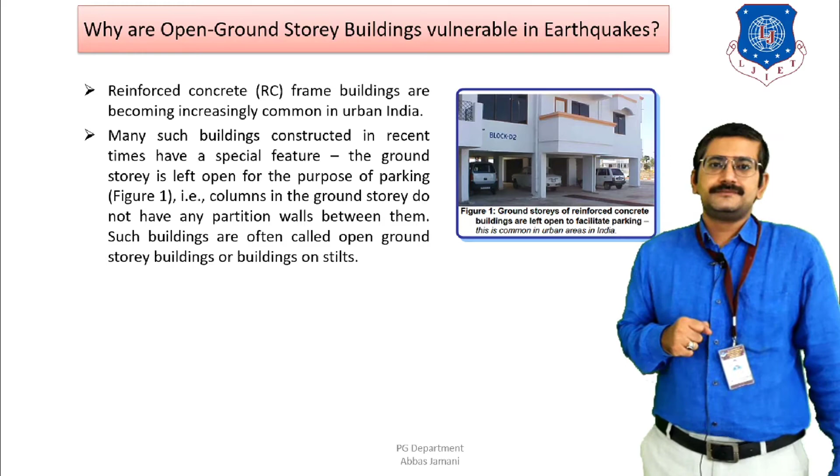And I hope that today's lecture is going to give you sufficient insight about the importance of masonry walls at the ground level itself, so that the strength and the ductility of the building can be ensured. So when I talk about open story buildings, history itself says that the performance of these buildings has always remained poor in earthquakes. In the 1999 Turkey earthquake, the 1999 Taiwan earthquake, or the 2003 Algeria earthquake, it has been observed that buildings with open ground story have been vulnerable, and a lot of buildings of similar geometry or planning collapsed during the severe shaking of the ground.

So this is a scenario that is observed worldwide. But when you come to India, at the local level, a large number of buildings can be seen coming up in the country as well as in the city. In Ahmedabad, it is said that approximately 25,000 five-story buildings are present, and around 1,500 11-story buildings. Now this is old data. At present, buildings are 7-story, 12-story, 14-story, and now we even have 22-story buildings. And next we are going to have 30-story and 70-story buildings coming up, right?

So a large number of these buildings are coming up on a daily basis, and all of them are going to have the same feature, that is the open story at the ground level. Why? Because parking facility is to be provided, and then partition walls are absent in this type of building. I have given the example of Ahmedabad, but similar buildings are coming up in other cities also, located in zone 3, zone 4 and zone 5. All these three zones are seismic prone, and any multi-story building with an open story at the ground level is going to be severely affected if not properly detailed or properly designed.

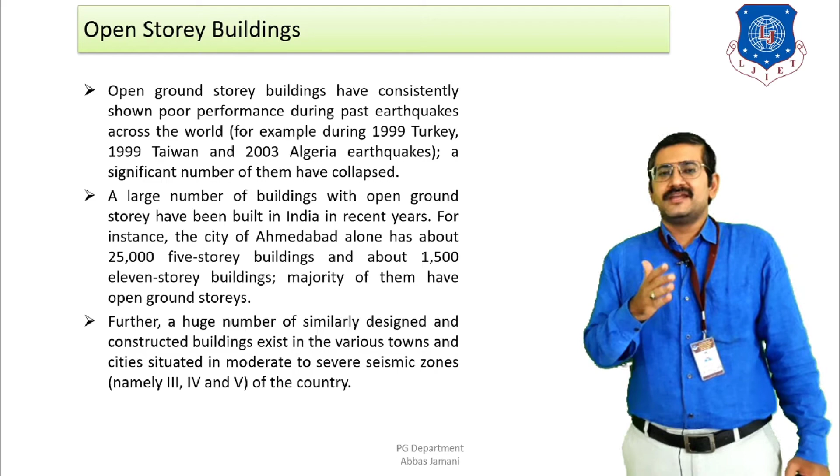So now what is the actual problem? That is what we are going to understand next. From function point of view it is okay, from elevation point of view it is also okay, but from structure point of view, what is the actual problem, as a result of which we are taking up this topic under the effect of earthquake loads today?

That is, the buildings which have columns at the ground floor and both columns and masonry walls at the stories above are going to have two peculiar features. The first feature is that the ground story is going to be flexible in nature. Why is it going to be flexible? Because the horizontal displacement that the ground story undergoes is going to be larger as compared to the stories above.

Why? Because the stiffness at the ground level is going to be less as compared to the stiffness of the stories above. In the stories from the first floor up to the terrace level, the infill walls and the columns have a combined effect, and as a result the stiffness above increases. Whereas in the ground story only the columns are present, so the stiffness is less than that above. As a result, the horizontal displacement is larger at the ground level than at the stories above.

If this situation is there, IS 1893 coins this particular behavior in the structure as a soft story. That is what we discussed earlier also, that soft story is one of the reasons why open story buildings cannot perform sufficiently under earthquake loads.

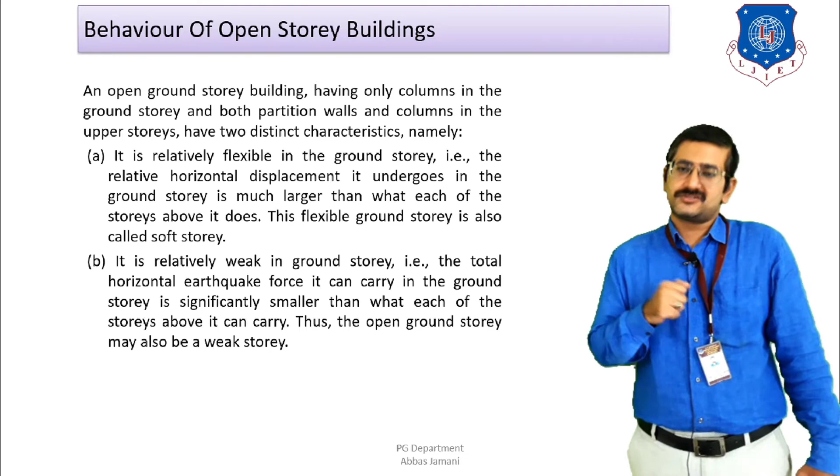That is, this story is comparatively weaker than the stories above: the ground floor is the weaker story, and the above stories are stronger. Now, when the geometry is such that there are only columns at the ground floor, and from the first floor onward both columns and walls are present,

the above stories are going to act as a single unit or a single block, and they move together under the application of lateral loads. Whereas at the ground floor only the columns are present, and as a result the movement is like that of an inverted pendulum, which we will see in the figure I am going to show in the next slide.

So when these horizontal forces act on the building, the building undergoes horizontal displacement. And we have discussed that in case of lateral forces, reversal of stresses is considered. That is, the earthquake force is likely to act in the plus direction and the minus direction as well, so there is back and forth movement.

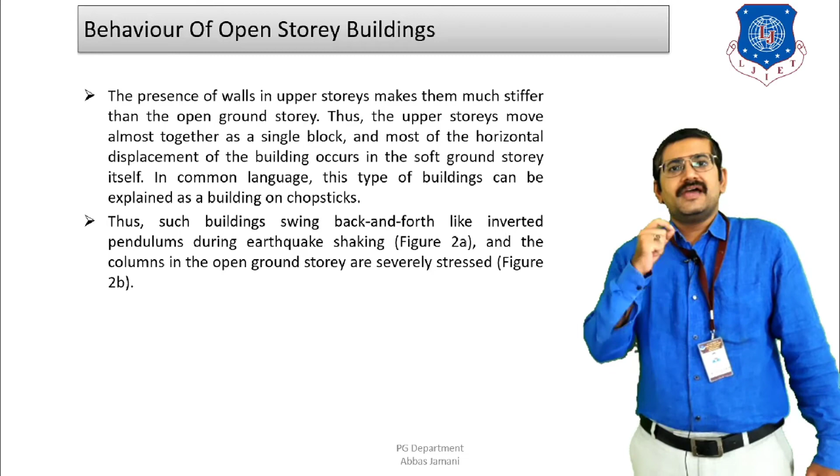This back and forth movement severely affects the strength of the columns at the ground floor, and at the same time it affects the ductility of the columns as well. So the columns are severely stressed from the ductility point of view and from the strength point of view when this type of geometry is seen in the building.

So as you can see in the figure over here, first the figure of an inverted pendulum is shown, where a single circular bar is shown, and on top of that the mass is shown. Now if I apply a horizontal force on this pendulum, then the stiffness of the bar is going to be different and the stiffness of the ball is going to be different. As a result, the heavier mass is concentrated at the top, so stiffness is going to be more at the top, less at the bottom. As a result, the behavior is going to be as you can see in the figure over here.

The same thing applies in the case of open story buildings also. The stiffness at the ground floor is going to be less, and the mass is going to be more at the upper stories. As a result, the stiffness is also going to be more at the upper stories, and since the stiffness at the upper stories is more compared to the lower stories, the behavior is going to be similar to that of an inverted pendulum, as you can see, right?

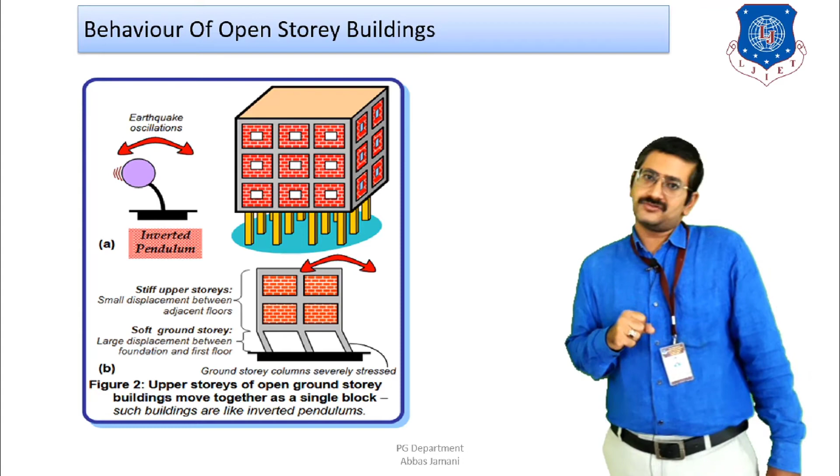So the upper portion of the block is going to act together as a single unit, and the lower portion of the building, that is the ground story columns, are going to be on the weaker side, and their flexibility is going to be larger compared to the portion above the ground story. Right? Now when this happens, the demand required from the column is that it should be capable of resisting a large amount of lateral forces. That is, the shear capacity of the column should be on the higher side. And second, a good amount of ductility is also required.

Why? Because as we have seen, the ground story is going to be flexible in nature, and then it is going to undergo back and forth movement. And when there is back and forth movement, large lateral deformation will take place in either direction. So if a sufficient amount of ductility is not there, it will not be able to withhold its position, and the collapse of the structure is likely to be initiated.

So in the previous discussion regarding the performance of masonry buildings and RCC buildings, we have seen that the design of the column was critical in the case of shear only, right? That is, the shear capacity of the column should be increased. But in the case of open story buildings, the criteria is changing. The columns need to be ductile in nature, and at the same time they should have good shear strength also. That is, the ductile capacity of the column should be there, and at the same time the shear resistance of the column should be on the higher side to resist such a large change in the stiffness.

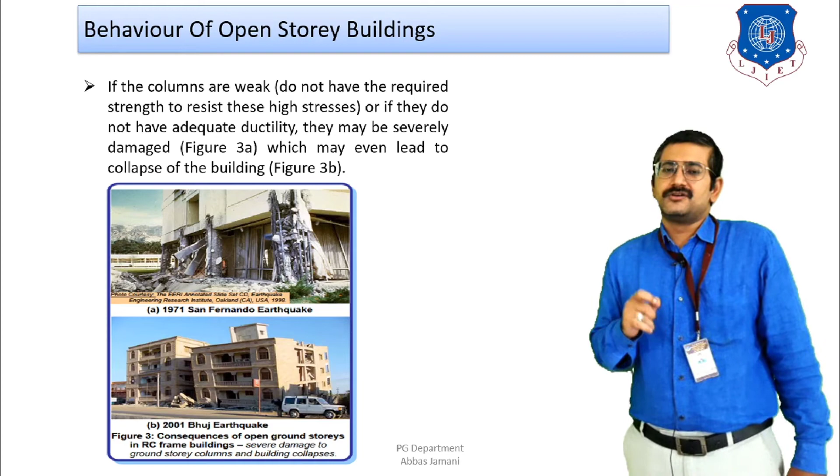So here you can see examples of the performance of two buildings under two different earthquakes. The first example is a building that collapsed in the 1971 San Fernando earthquake, and the second is the G+3 structure that collapsed during the 2001 Bhuj earthquake. In both these cases, the open ground story was present at the ground level where the parking facility was provided, and as a result, flexibility was generated in the ground story, the building could not perform well under the effect of lateral loads, and the failure of the structure took place.

Right, now where actually is the problem? One problem, as we have already seen, is the insufficient provision of masonry walls. If a sufficient amount of masonry walls or infill walls are not provided at ground level, then it is going to create a problem. Now the second problem is at the design office level. Why?

This element is such that it is going to be present irrespective of the functionality of the building, whether it is a residential building, commercial building, institutional building, whatever type of building. The walls are always going to be present from the functional point of view and from the privacy point of view also, right? So as a result of that, these walls are never going to be eliminated from the structure.

But what happens is that when this particular structure is being modeled in the design office, the effect of the masonry infill wall is not considered. That is, the structure is going to be modeled as a bare frame structure. When you model this particular structure as a bare frame structure, then as a result of that, the effect of the inverted pendulum that we have seen in the earlier slide cannot be visualized in the design office.

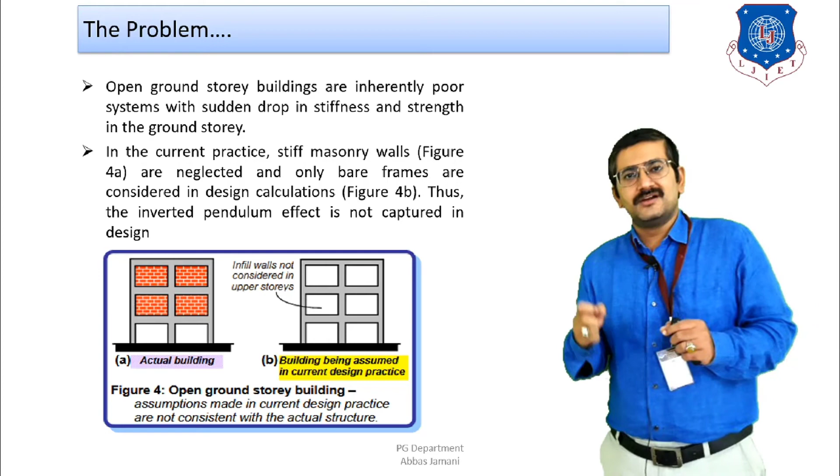And as a result of that, whatever assumptions we are making in the design office are not falling in line with the actual performance or the actual condition that is going to be there on site. So this is also one of the additional problems which needs to be addressed by the structural engineer in the design office as well.

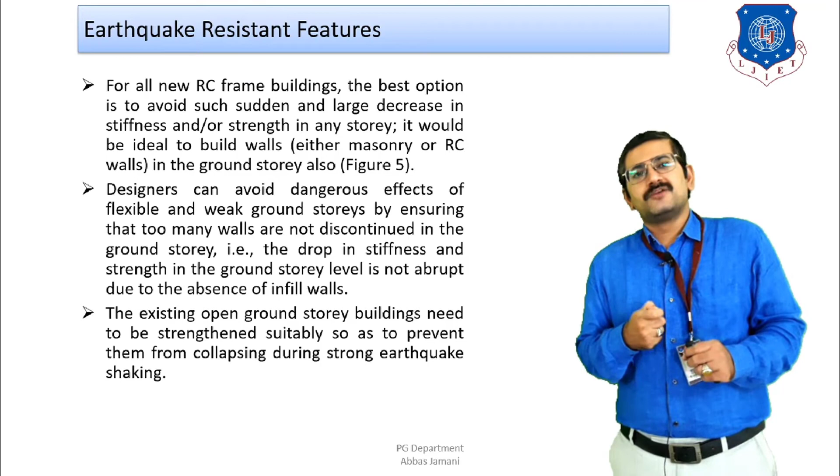Lastly, the question comes: what is the solution to this problem? We cannot close the ground story structures from all sides by introducing masonry walls and completely eliminate the parking. That is also not one possibility, right? Because if that is how we are going to deal with it, then how will the movement of vehicles take place, or the movement of the persons that are going to live in the building? So complete closure of the peripheral boundary is also not a solution that we can say is going to be an optimum solution for the ground story.

But what we can do is that if you are going to put a new project on site, then from the planning stage itself, this particular aspect should be taken into consideration. A mutual discussion should be held between the architect, the structural engineer and the developer. And the structural engineer needs to brief the architect as well as the developer regarding the consequences that are going to happen if this building is designed with an open ground story, right?

So once the client is also educated, I'm pretty sure that some viable solution will be worked out by the developer and the architect as well, and some modification will be done in the planning. So if you are going to put up a new project, the first suggestion is that the discontinuity in the wall should be avoided, and the open ground story, or the soft story or weak story, should be totally eliminated from the building.

Now, how can this be totally eliminated? You do your calculation for the parking and allotment of parking for vehicles, and you put sufficient provision in the basement itself. That is, you plan your project in such a manner that the basement itself is capable of accommodating all the vehicles that are likely to be there in this particular campus, right? So that is how proper planning will help us to eliminate this problem to some extent.

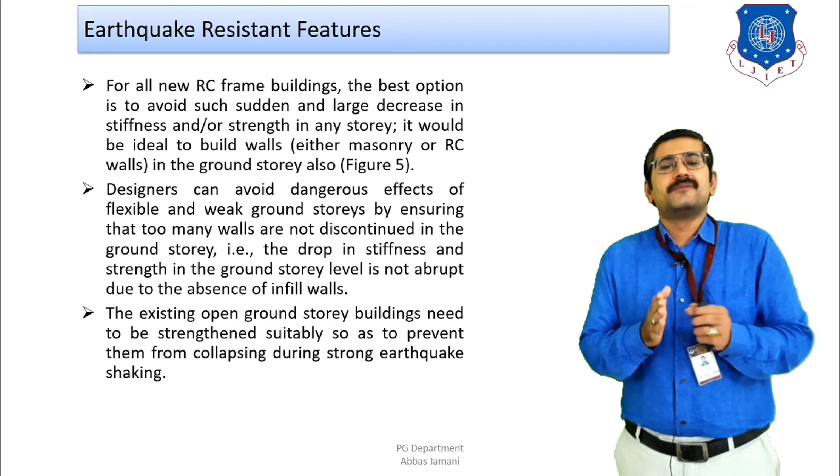So whichever buildings have this weak story or soft story effect should be cross-checked again as per the guidelines of IS 1893. And if required and found that these columns are deficient in carrying the lateral forces as mentioned by IS 1893, then the shear capacity of these columns should be enhanced by adopting any of the retrofitting techniques that are possible and available in the market.

Now, in order to get an idea about the retrofitting tactics, a qualified structural engineer should be hired and assigned the task of reviewing the entire design of the building, and he should take into consideration all the clauses related to soft story and weak story mentioned by IS 1893. That is, approximately 2.5 times shear should be applied on the soft story and the performance of the building should be checked. Right? And once this is done, the appropriate retrofitting technique should be adopted and these buildings should be enhanced before a major collapse or major calamity is observed under the effect of lateral loads when subjected to earthquake forces.

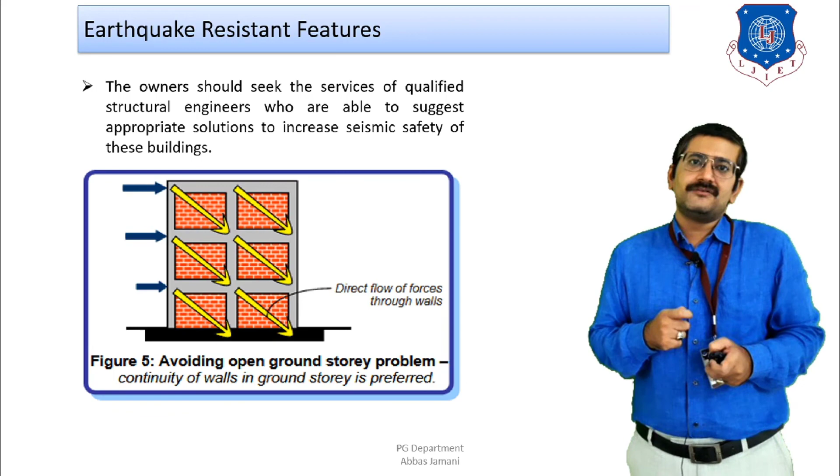Right? So that is why the consideration of infill walls in the design office, at the planning level, and at the execution level is going to play an important role in the performance of open story buildings when subjected to lateral loads. I hope you have understood the importance of provision of masonry walls in these open story buildings in order to enhance their performance under the effect of lateral load.